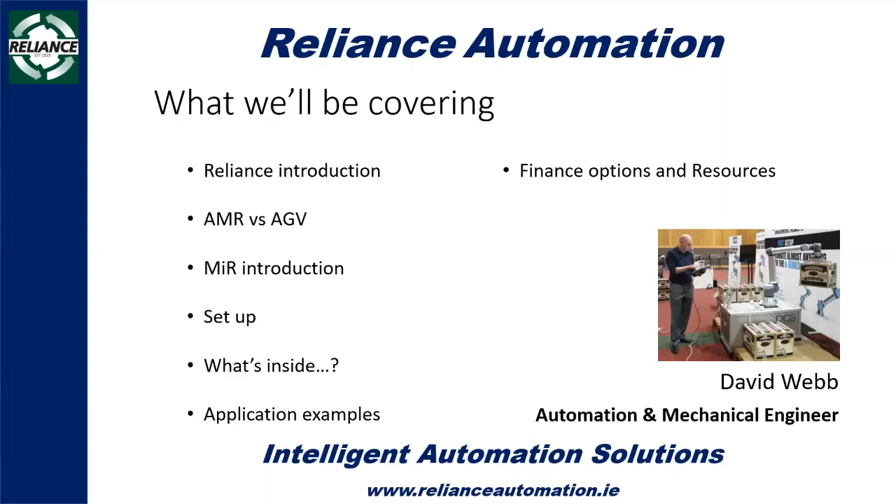So firstly, just a quick introduction into Reliance. Reliance Automation, we're a division of Reliance. Originally, they're Reliance Bearing and Gear Company. Reliance has been going for almost 100 years now at this stage, distributing within Ireland, started back in 1925, into the fourth generation of a family-owned business.

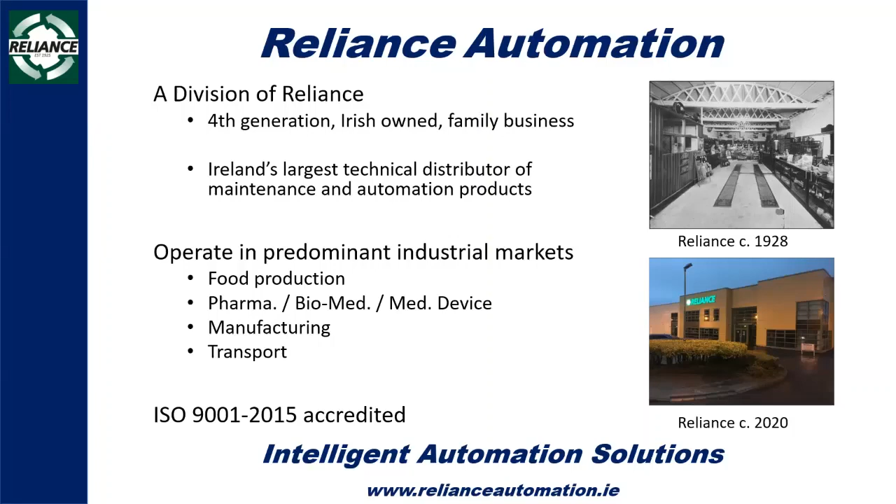We're a large technical distributor of maintenance and automation products, and we work in most industries around Ireland, with definite focuses in food production, life sciences, manufacturing and transport areas. We're also an ISO 9001 company, and in everything we do, we always strive to provide the best technical response while giving you good service and also value for money.

So Reliance, we've got 3 branches in Ireland. We've got the Dublin branch where I'm located, we've also got one down in Limerick as well, and our head office is down in Cork. About 50 personnel on board with us now at this time, covering the whole country for the different areas and the products we represent.

The main thing to note is that Reliance are a distributor in the true sense of the word, so we're not an integrator. A lot of the products that we sell would be out-of-the-box solutions that could be utilized for companies that don't have a huge amount of automation experience within them. But for more complicated processes that require a bit of design, etc., we work with an awful lot of the integrators in and around Ireland.

Each one of these integrators will have specialities in terms of the areas that they can address, whether that be the food sector or pharmaceutical, etc., and also in their locales and the geography that they're covering. So between the two of us, we're able to address any of the needs that you may have and come up with a solution for problems in your industry or the challenges you may have.

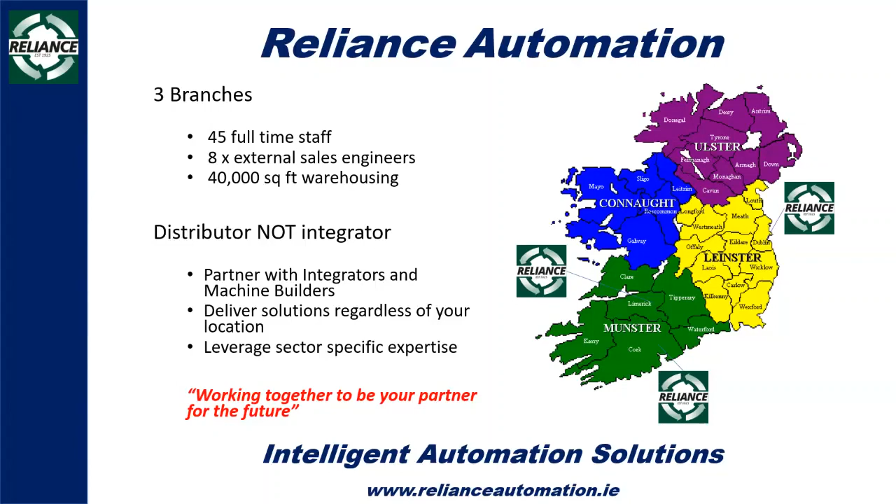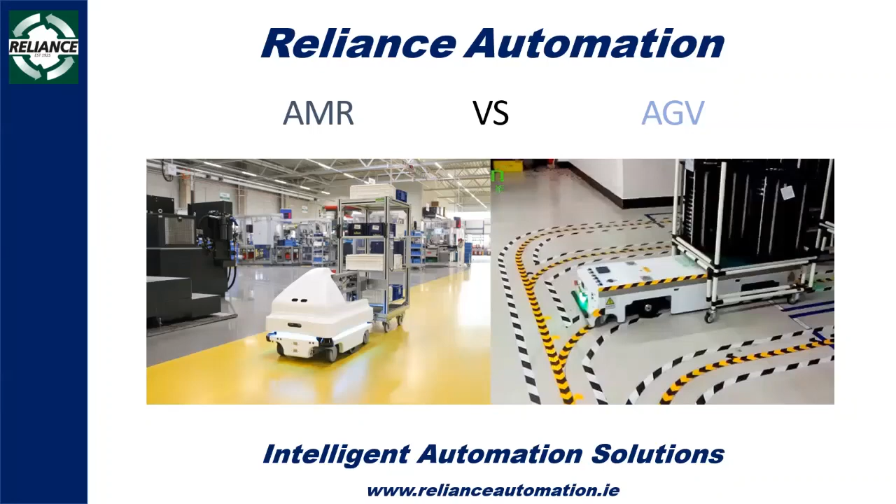Just before I jump into MiR's introduction, I wanted to go through the AMRs, so autonomous mobile robots, against AGVs, the automated guided vehicles. Because AGVs, as I said, have been out there now for quite some time, whereas the AMR technology is just the next iteration of this, and there's a few differences between them in terms of their capabilities.

AGVs typically require some sort of guidance system, like tracks along the floor, which is probably the most common one, to guide them from location to location. If they come in front of an obstruction, they can't physically move off that track, and it requires them to stop and somebody to come along and move that obstacle. It also makes it quite expensive to change, so they're not particularly flexible.

You've got to go in there, set down your tracks, and do a fair bit of forward planning in terms of the areas you're going to be going into. If you need to change that later, it's a case of putting down new tracks and changing it around. So they're somewhat restricted in that case.

Whereas the AMRs, these systems don't actually require tracks. All the guidance is done by the unit itself, creating a map and planning a route around that area. With the use of its sensors, it can detect if it comes up against an obstacle, whether that be something like a pallet in the way or a person, and it can then plan a different route around that.

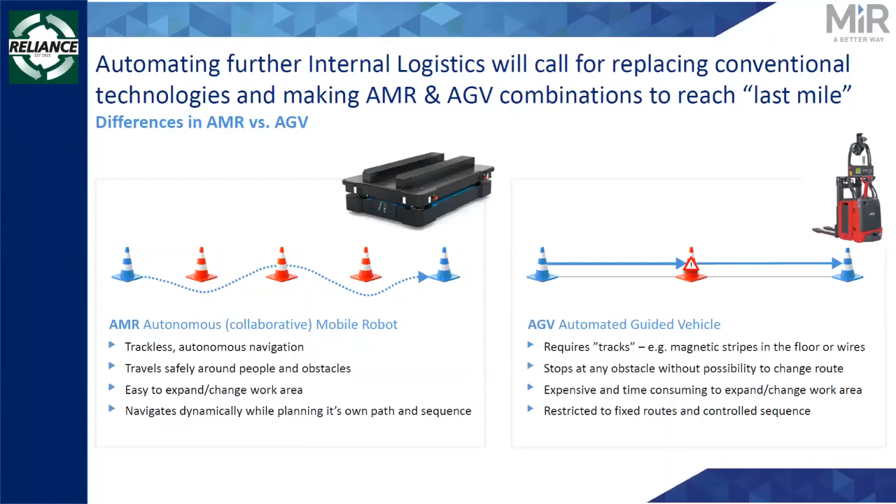You can set how many times it will try to do this before it provides an error, anywhere from around 10 up to 100. It can run through this, which means you don't necessarily have to be on hand to assist the robot between locations. If there is something unexpected, it has the intelligence to be able to move around it.

So now that we know what AMRs are, we'll jump into the MiRs specifically. MiR are mobile industrial robots, and they're a relatively young company, started in 2013 in Denmark. The story behind them is that the team that came up with Universal Robots a few years earlier sold Universal Robots to Teradyne, and some of those members then started to focus on the AMR side, creating the MiR unit. It was so successful that Teradyne actually purchased that company as well, so they're all part of the same group now, with a lot of synergies between them, both based in Denmark and in the applications.

You can see Universal Robots get inserted on top of a MiR unit for some activities. Even though they're a relatively young company, they've got over 200 employees around the world, and they've put a huge amount of that manpower into research and development behind the products. They're constantly increasing the product range - they initially started with the MiR 100, 200, and now have up to the 1000, plus the 250 that just came out very recently. We've also got an extensive support network - ourselves here in Ireland are the representatives for any local support.

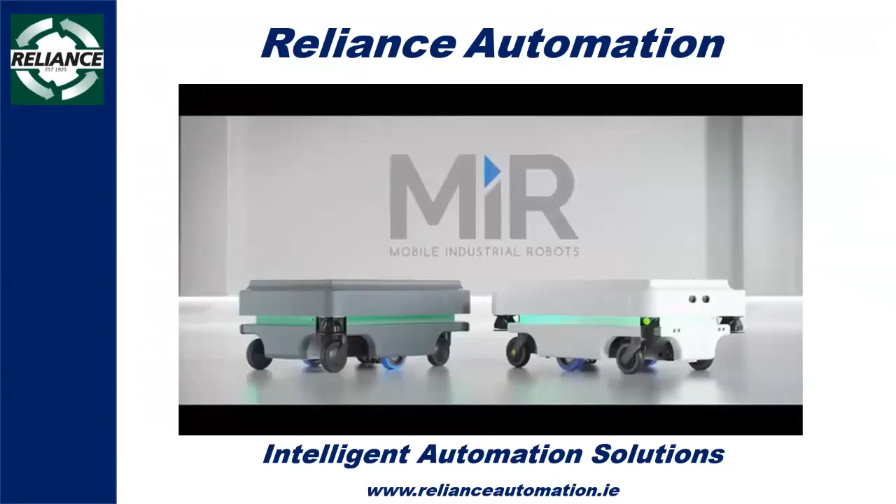At this point, the best thing to do is show a quick video which goes through what the MiR units can do and how to utilize them, just to give a quick introduction before we jump into any of the major details.

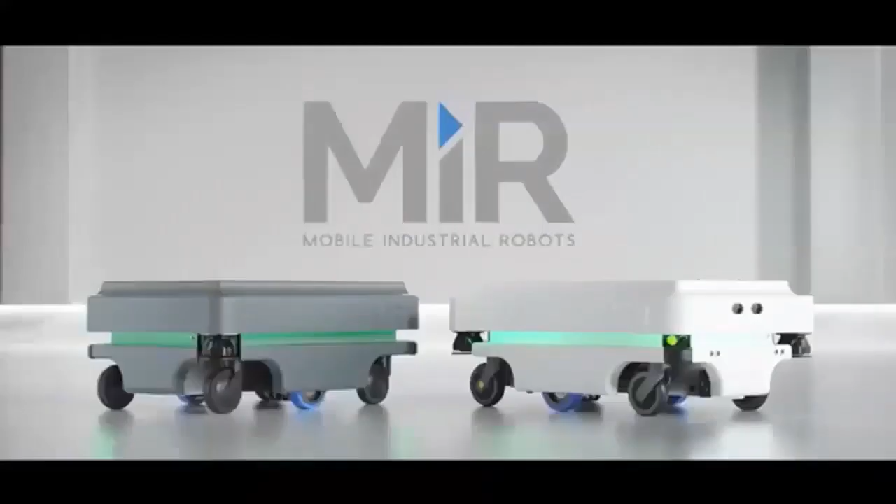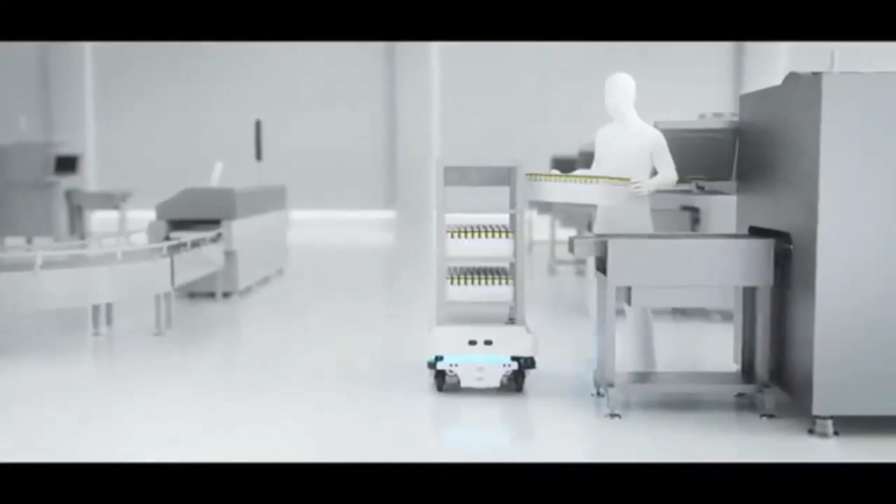Imagine a fleet of collaborative mobile robots that could optimize your workflow, increase productivity, and reduce costs. What if it was 100% automated and could collaborate with employees? And what if it was fast and easy to integrate into any type of factory layout? Sounds like something from the future, right? Actually, it isn't. Let me introduce you to Mobile Industrial Robots, MiR, an efficient and flexible mobile industrial robot solution.

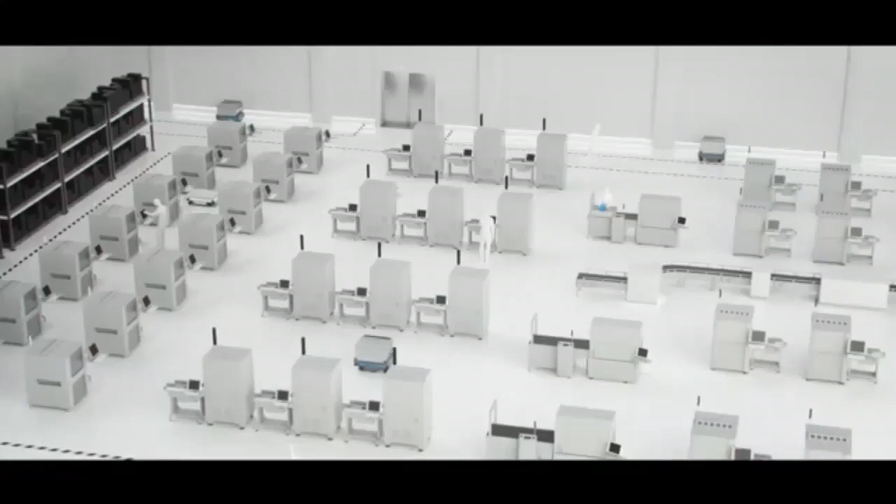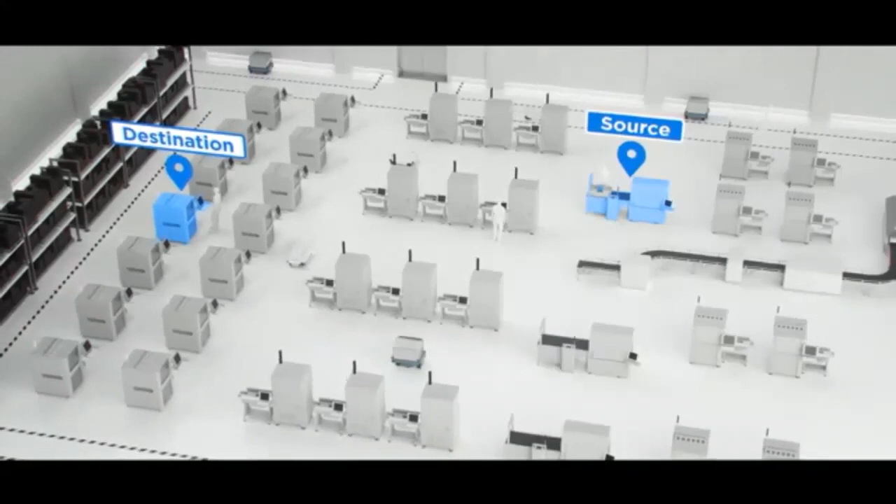So how exactly does the MiR fleet work? Let's have a look. Now the employee here would like to send the item he's just finished working on to the next production line. With the press of a button, a MiR robot is summoned. Once the button has been pressed, a signal is sent to the MiR fleet management software, which runs behind the scenes and manages all the MiR robots. The system automatically instructs the appropriate robot to navigate to the source point. The item is placed on the robot and is ready for transit to its destination. The robot drives 100% autonomously and can easily navigate around obstacles on its way.

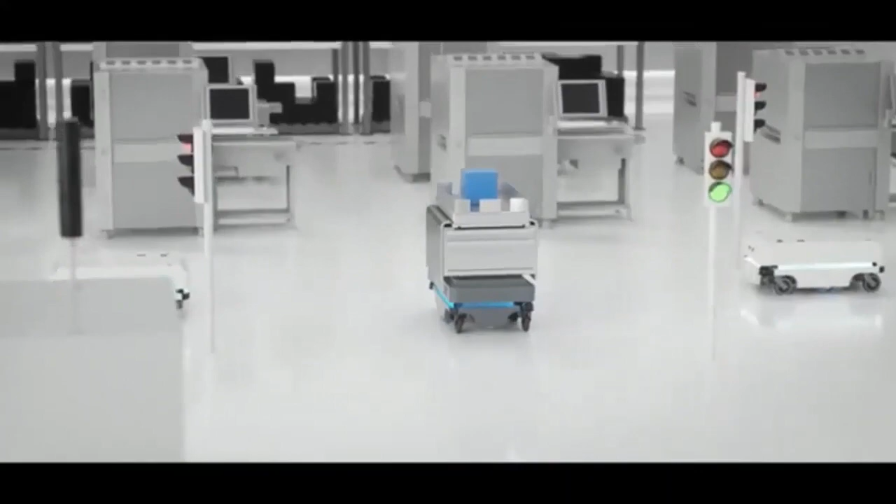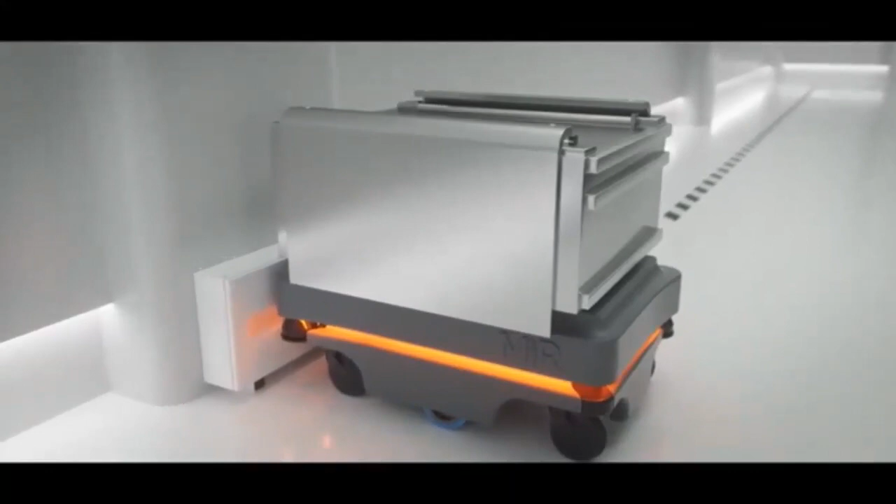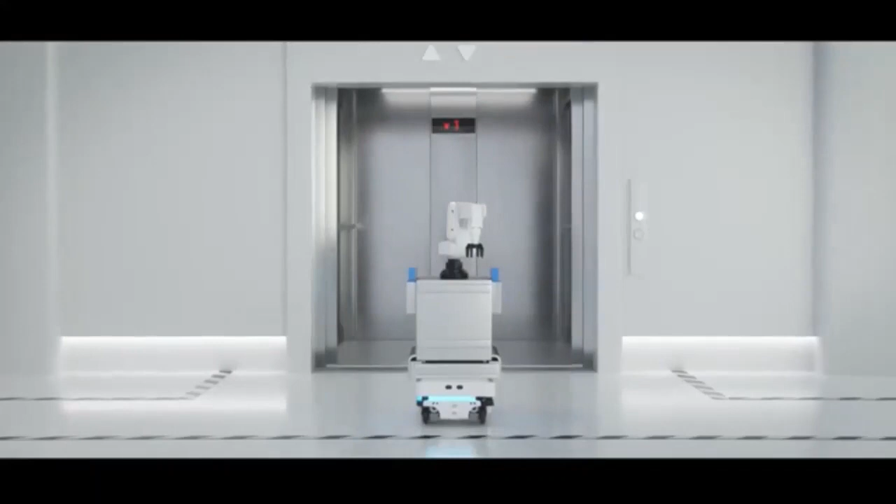The fleet management software automatically adjusts traffic in real time, ensuring that everything runs smoothly and efficiently. Now the robot has delivered the item to its destination. If there's nothing else in the queue, the robot can be set up to automatically park in a preset parking spot and recharge. The robots can also be summoned via tablet, automatic communication from production lines, or via your ERP system. You even have the possibility to create rush orders that are placed at the front of the order queue. Because the robots drive autonomously, they can perform complex maneuvers, such as navigating across multiple floors.

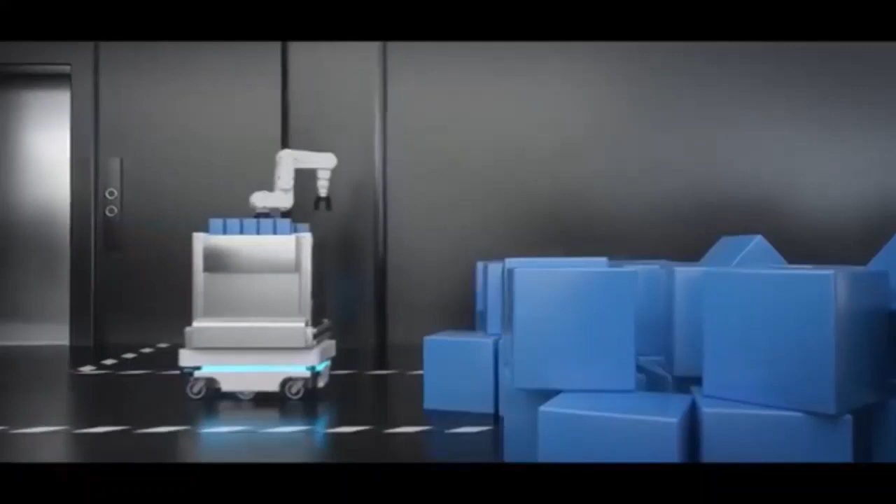If a robot encounters an obstacle that it can't navigate around, a notification is automatically sent to the user that an action is required.

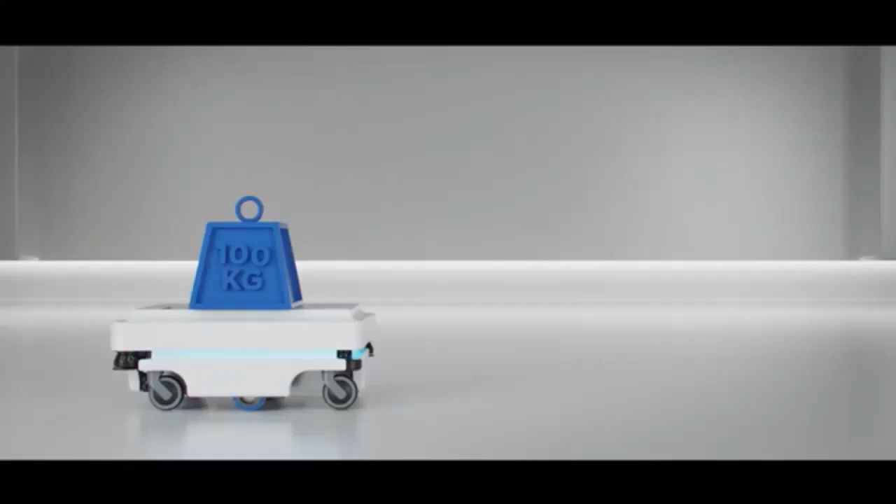When the item has reached its destination, the robot automatically sends a notification. The top modules are easy to change, so the robot can be redeployed for different tasks, whether transporting small, medium, or large items. We've got the solution to automate your internal transportation and logistics.

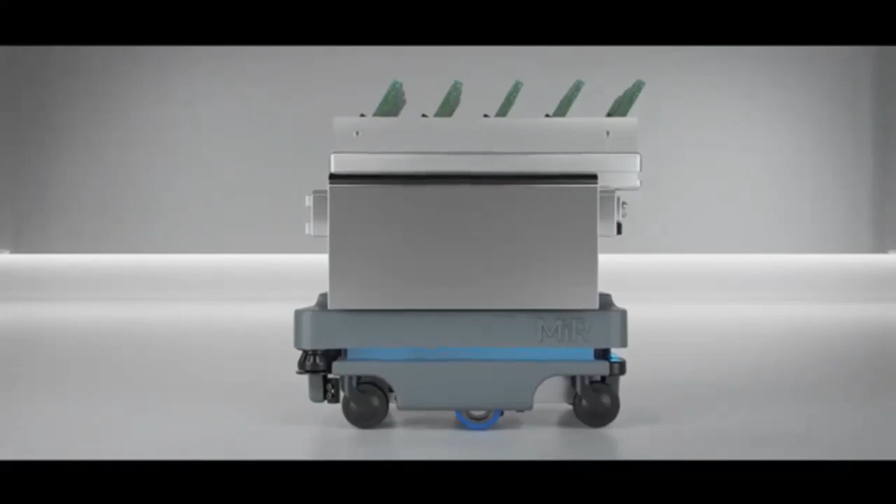Programming the MiR robots is simple. The user-friendly and intuitive interface allows for fast and hassle-free implementation. And you get customizable dashboards that make it easy for you to tailor the interface to your individual needs.

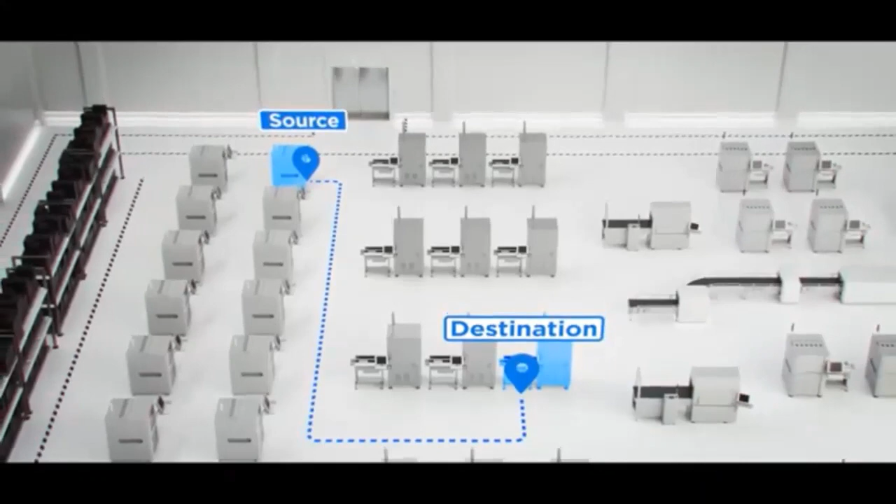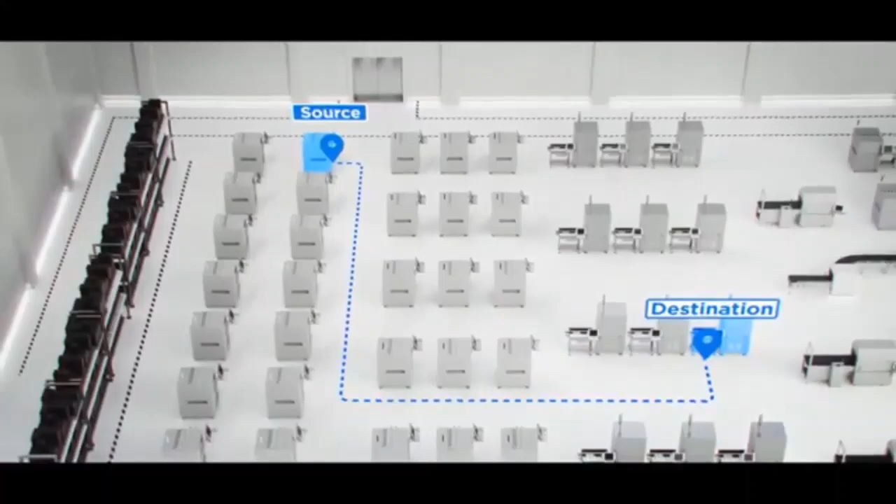At MiR, we know that factory layouts change rapidly. That's why we made it easy to reprogram routes. A few clicks and you're ready to go. It's that simple. MiR is one of the fastest growing companies in collaborative robotics.

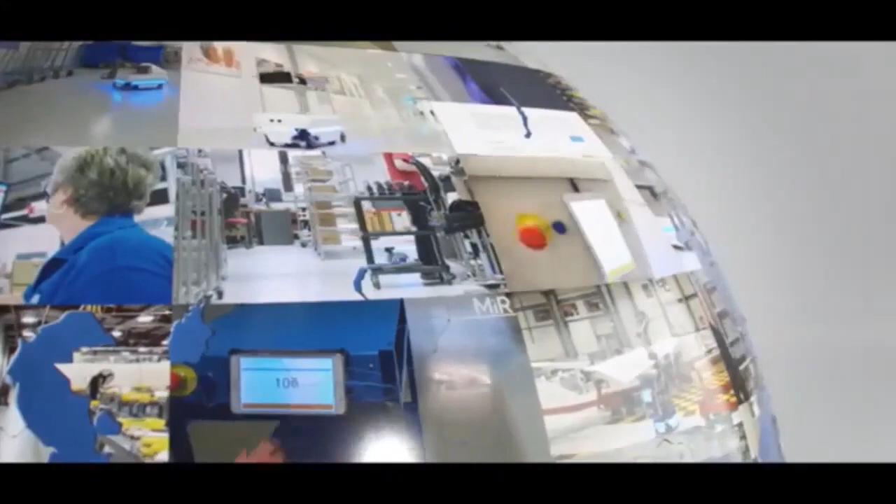Our solutions are used all around the world and are helping companies to increase productivity, profitability, and to streamline workflows. Contact us today to learn more about how we can help automate your factory layout. MiR Robots.

So I hope that was a good quick intro, just showing some of the features and how these things operate. Let's go in a bit more detail, like the way it navigates around the facility is by the sensors, and when we pop open the hood in a couple of slides time, you can actually see exactly which sensors are in it. And these are the ones that detect the surroundings.

You use these for mapping the facility initially, and then also for the actual navigation when it's doing its local routes around the facility. So it's very, very reactive in terms of how it can sense its surroundings and personnel coming towards it.

And it can run at various speeds and different safety settings as well, depending on what you're having on top of the unit or what activities it's conducting.

They're very, very simple to program. We'll run through the setup process just to show how easy it is to go, but essentially as soon as you get the unit in its box, you can have it up and running within an hour or so.

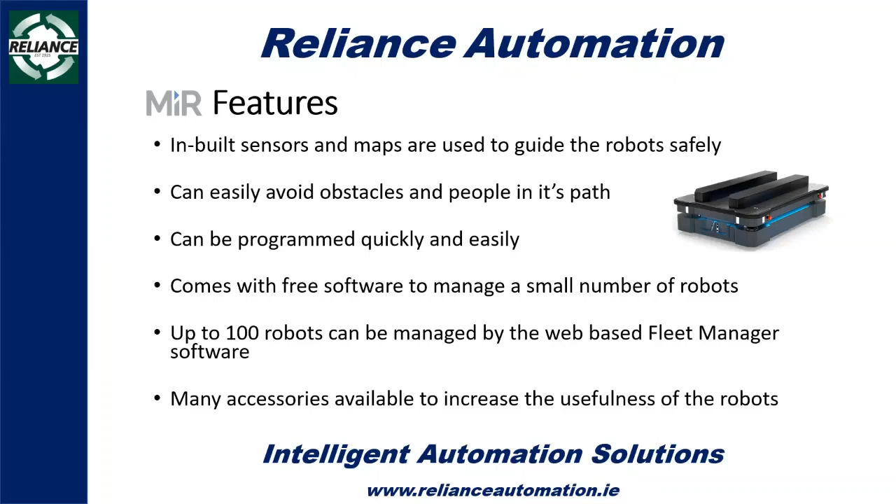So say, for example, the first one in the line is MiR 100. It can handle a payload of 100 kilos. And these go all the way up to MiR 1000, so taking on a ton of weight. They've recently released a MiR 250 in the last couple of months.

And in a lot of cases, the actual payload when they're towing rather than just lifting directly is actually a lot higher. I believe the MiR 100 can take up to around 200 kilos when it's pulling along. Similarly, the 200 can take up to about 500 kilos or so. So there's a bit of flexibility there in terms of solutions.

On top of the MiR units themselves, MiR manufacture a few accessories that go along with these, such as the MiR lifts. So if you're having a palletizing application, you can actually place the pallet on top of a little stage, and then the MiR unit can come underneath that stage to collect the pallet.

They've also got their own charging stations as well. These can be just bolted to the wall, and then the unit can find its way there. And we mentioned the MiR fleet then for when you have more than one unit and want to go into programming priority tasks and things like that for your fleet.

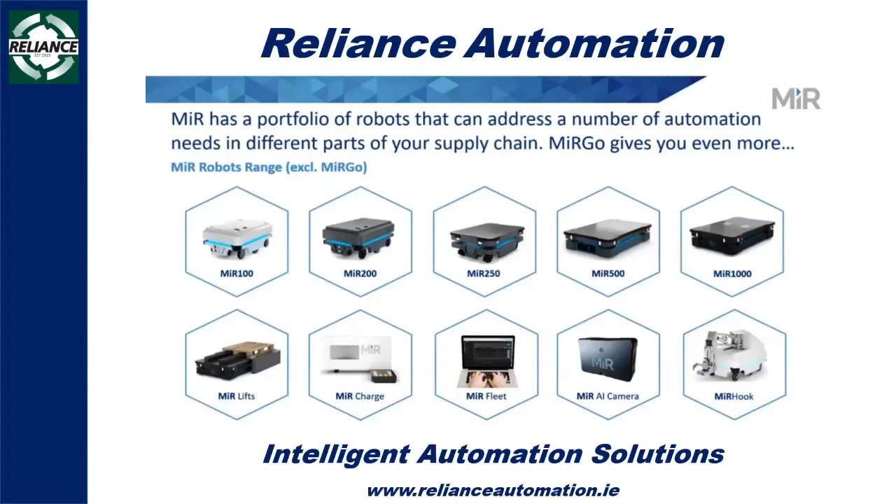So as well as what MiR manufacture themselves, they also have an ecosystem called MiR Go. This would be very similar to the UR Plus concept if you're familiar with universal robot units. So essentially, third parties design up parts - these may be conveying systems, shelving units, or ways to integrate robots onto the top of the MiR units.

And then these are certified by MiR themselves. They have a look at the design and the software and all the other applications that deal into that, and then certify them within their system. On their website, you can see all the different applications these are associated with. So it's not just the MiR units itself, you've got access to a huge range of functionality within that.

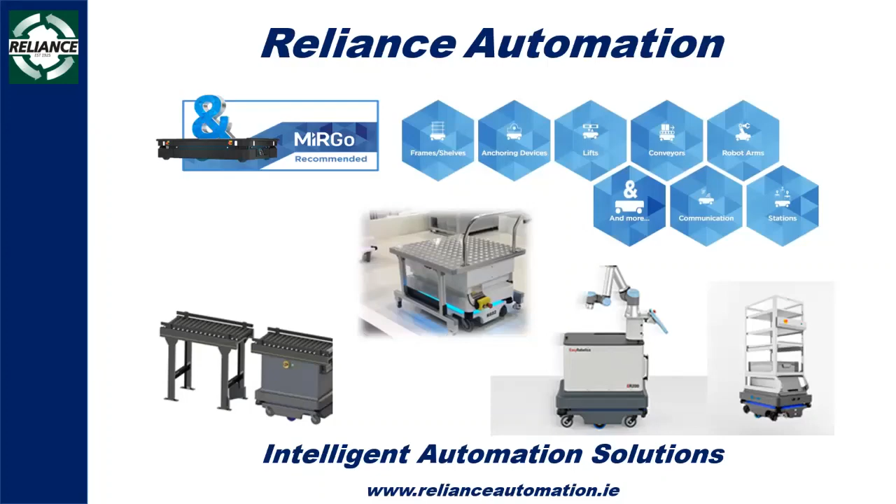So since we've talked about the features and the units themselves, we'll have a quick look at the setup. We said it's very easy. We recently got our unit into Limerick a few months back, when we had our own test day with it, and it is just as they say.

Essentially, the MiR unit comes in a wooden crate, and what you've just got to do is drop the four sides off the crate. You've then got to power on the unit, so just take off the hood and flick a few switches, put on the emergency stop onto the unit, and then once it's powered up, you connect your mobile phone, tablet or laptop. Mobile phone tends to be the easiest piece, and you essentially get a joystick and just drive it off, and then you're good to start your programming journey.

After that, you'll start to map your facility, and depending on the size of the facility, this can take maybe an hour or so, depending on how many floors you're looking at. But our Limerick warehouse was mapped within the hour. And then after that, you can just start setting tasks directly into the software. So very, very quick and easy to set up.

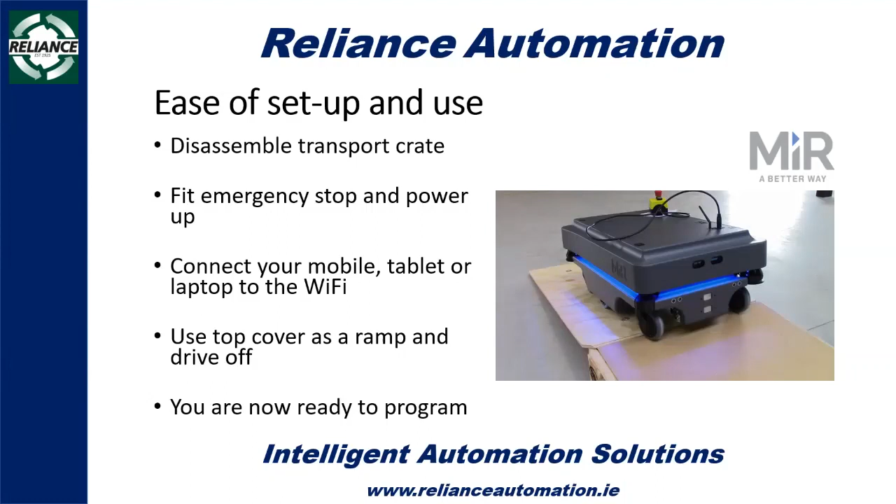In case you don't believe me, I've just got a video here that shows you exactly those kind of steps that it goes through.

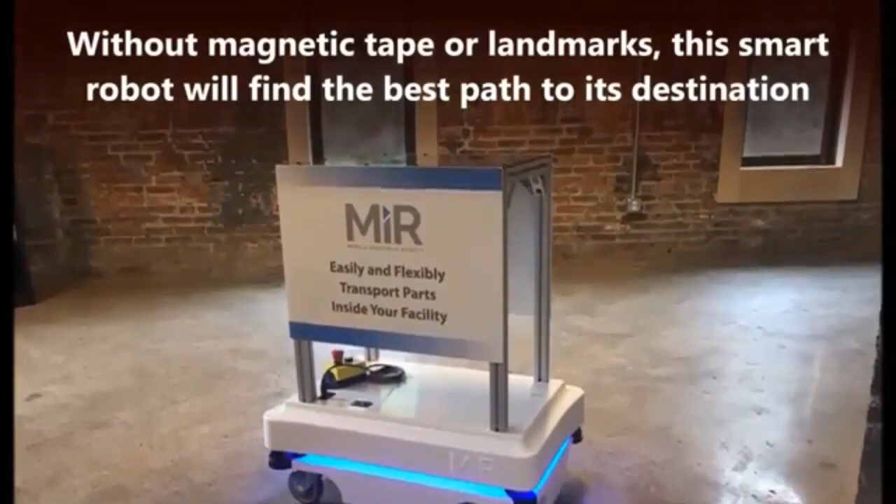So yeah, very, very simple.

So after we've had a look at what these units could do and how we set them up, we'll go into a little bit more of the technical side of things and how they actually achieve this.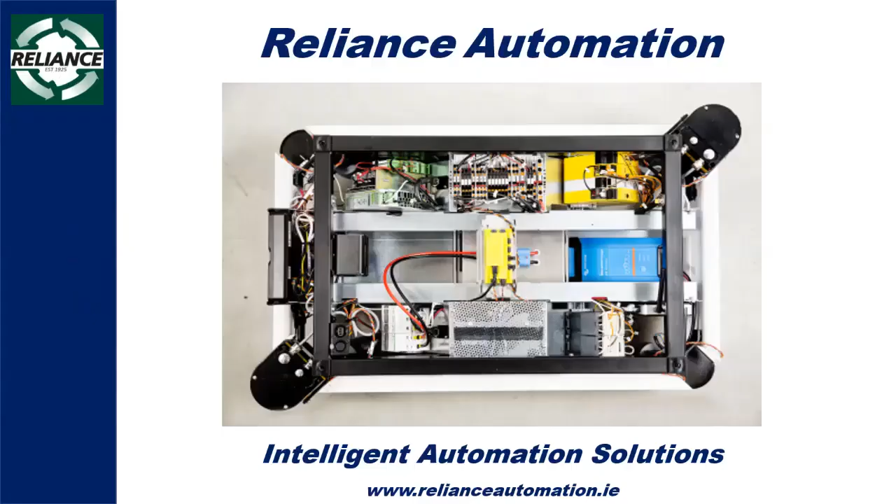So here we have one of the MiR units, the MiR 100, and essentially it's just got the top module pulled off it, and then you can see all the internal pieces within there. The first piece, on the left-hand side, which is the front of the robot, is the 3D scanner. This scans the environment, specifically picking out pieces at a height so that you can actually see what's around it.

Then in both of the corners, the bottom left and the top right, you've got two safety scanners. What these do is give 270 degrees of view around the robot, so that once these are consolidated within the system software, you've got full 360-degree information being fed back into it.

The blue device on the right hand side is then the battery pack. So in this unit there's one battery, but in some of the models you can also have two batteries to increase the life of the unit as well.

So you can see the power supply, the drive system, and the contactors are all contained within the meshed unit there, so as not to cause any interference within the unit.

And then in the bottom right, you've got the LAN connections for setting up your Wi-Fi and for connecting into it. The robot utilizes the scanners as well as encoders within the motors to be able to locate itself and tell it where it is at any given time.

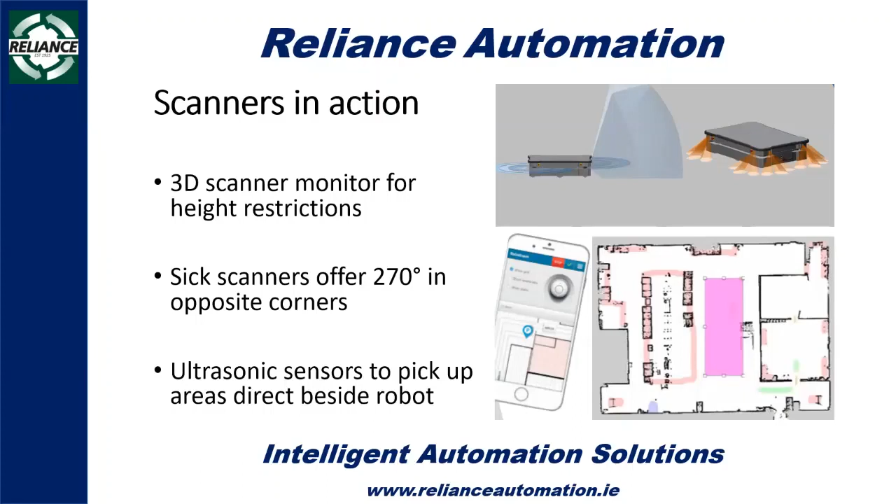As well as the standard units, there are also units with ESD and clean room classification. The smaller MiR units, the 100, 200 and 250, are clean room certified.

They've got different aspects on them that help with containing the dust that might come off the wheels or anything. And they're also electrostatic protection certified as well. You can get that option, so they can be utilized in a variety of industries.

Pharmaceuticals or electronics manufacturing would probably be the two most common industries where these are seen or required. This allows you to essentially go from a clean room environment out into the warehousing area, saving personnel from degowning and putting their stuff on and off the whole time. These units can transfer in between and save an awful lot of time in the logistics from that perspective.

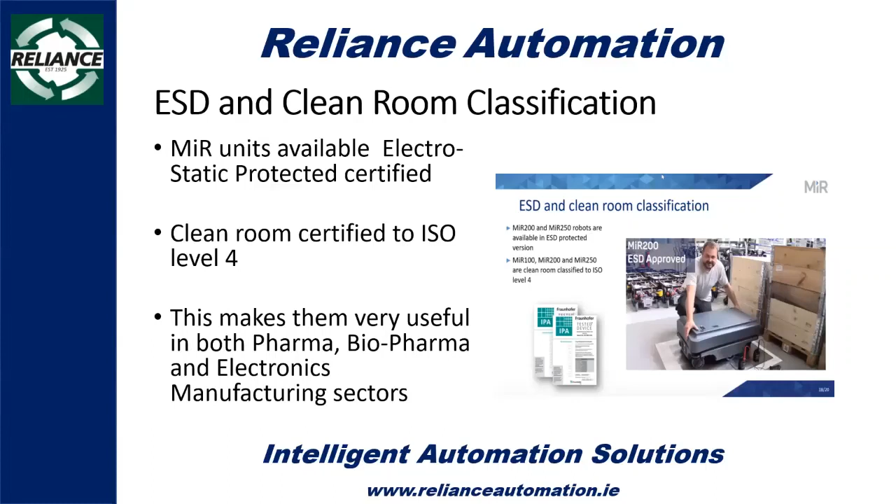So now that we've seen the range and what they can do, we've just got a few application videos here now to give you a snapshot of where these have been utilized in real industry.

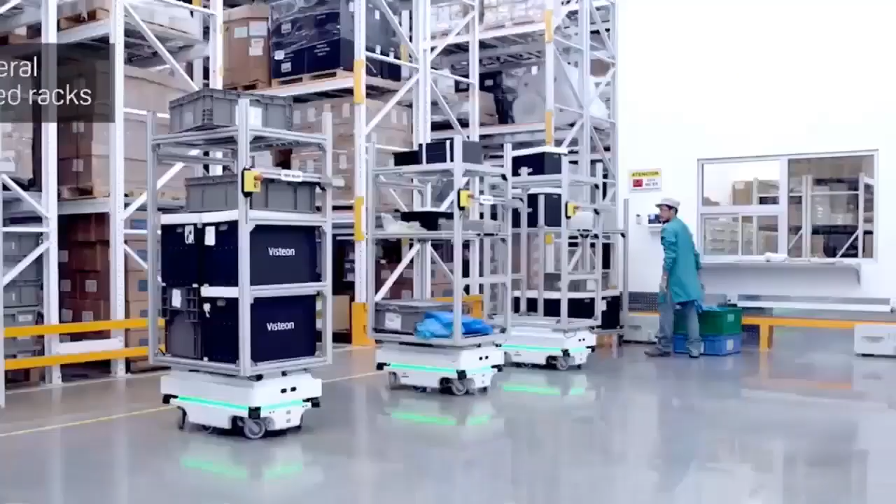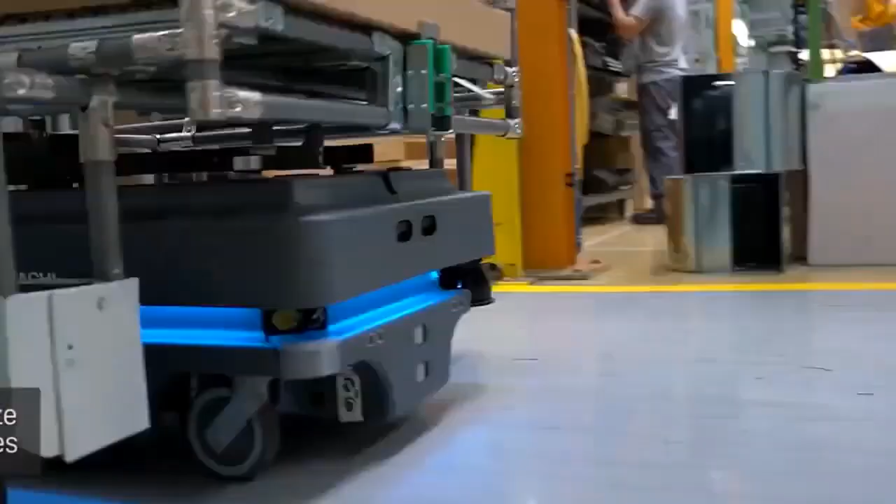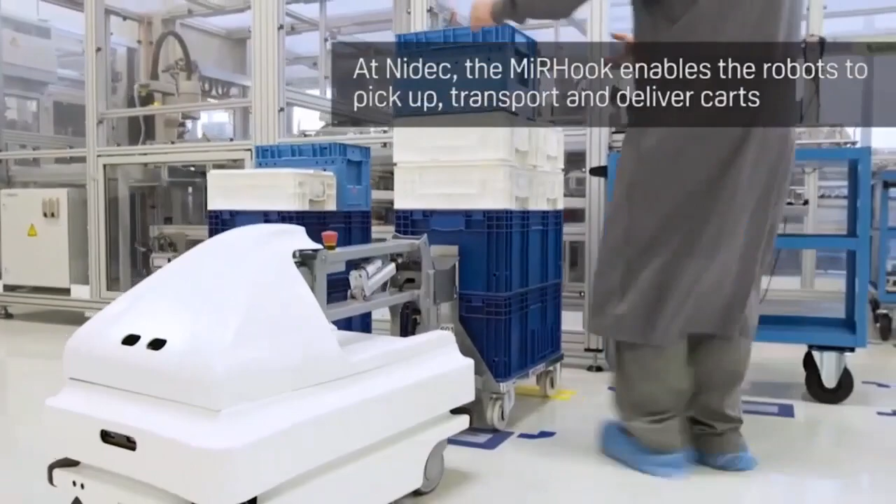We are constantly looking for ways to optimize our productivity and efficiency. The use of mobile robots enables us to implement these optimizations in order to improve our efficiency, productivity, and safety. They autonomously transport material and empty containers between warehouse and assembly. For this task, they're equipped with the MiRHook.

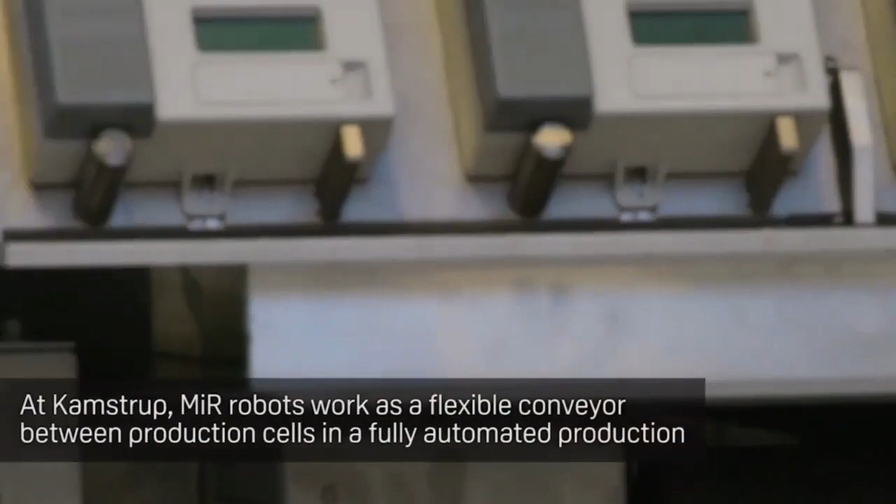We use MiR as a conveyor belt. We use it to transport our semi-finished products and our finished goods from production cell to production cell. Three MiR transport robots are now the adaptable link between different production lines. This is a new way to produce that enables Kamstrup to upscale without any production downtime.

We are currently using 7 of them with 3 different top modules. They are capable of detecting obstacles, and we not only track their location, but also their task at all times.

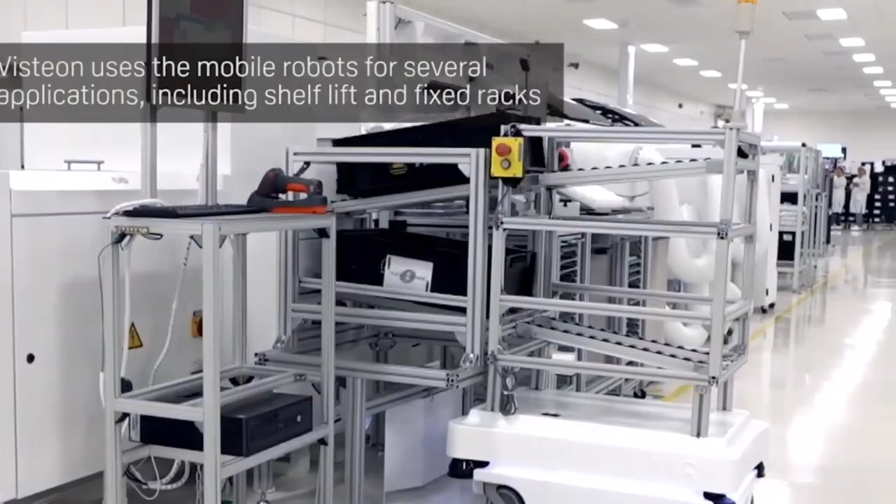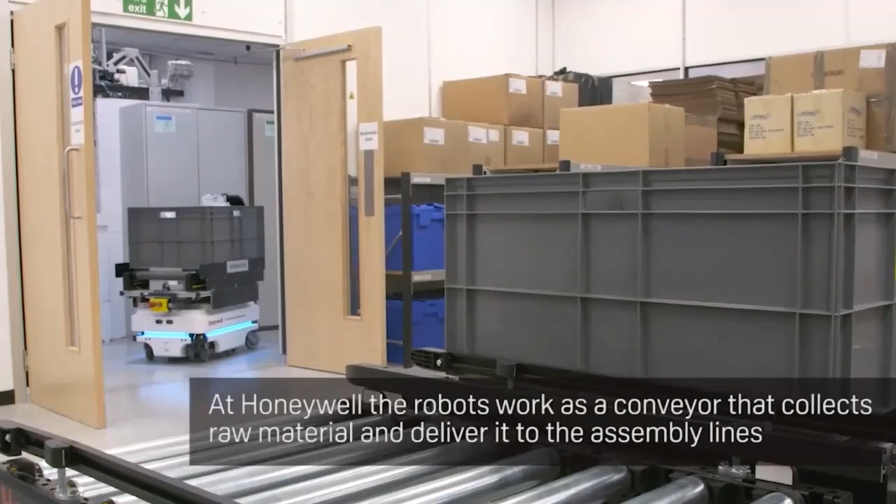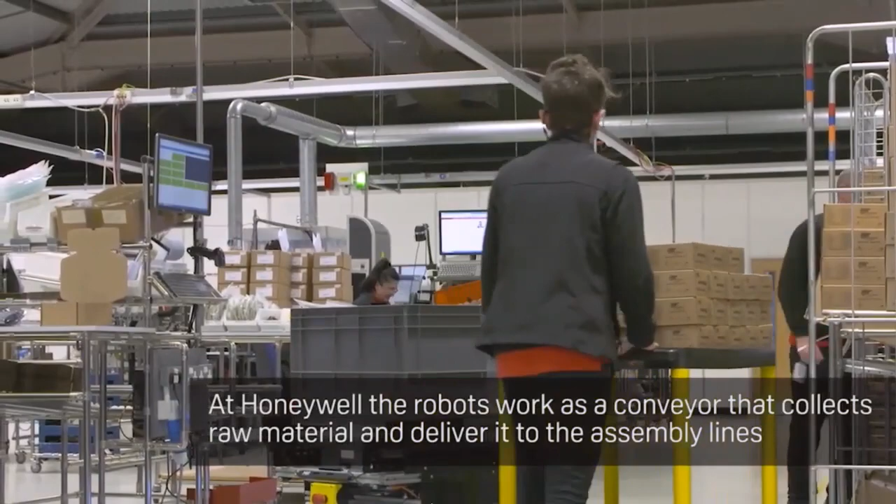We started on the MiRs just doing manual assembly line stuff in a very basic format. We upgraded the MiRs to have a conveyor system on them. They can now go down to the warehouse and collect raw material, and then deliver that to the lines. By putting the conveyor on the MiR, we gain the flexibility of being able to move anything where we want around the factory. Fortunately with MiR, they have an open interface so we can connect third-party equipment to the robots.

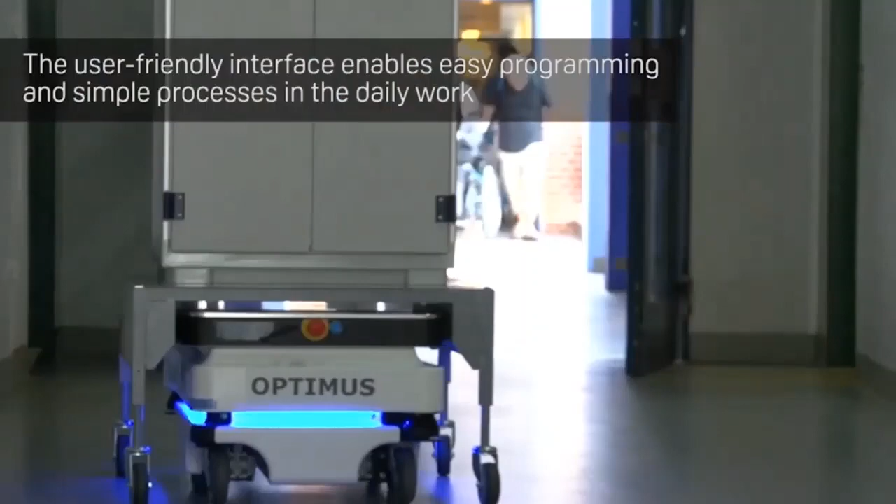We chose MiR as our mobile robot because it was a flexible solution in which we could see a lot of potential.

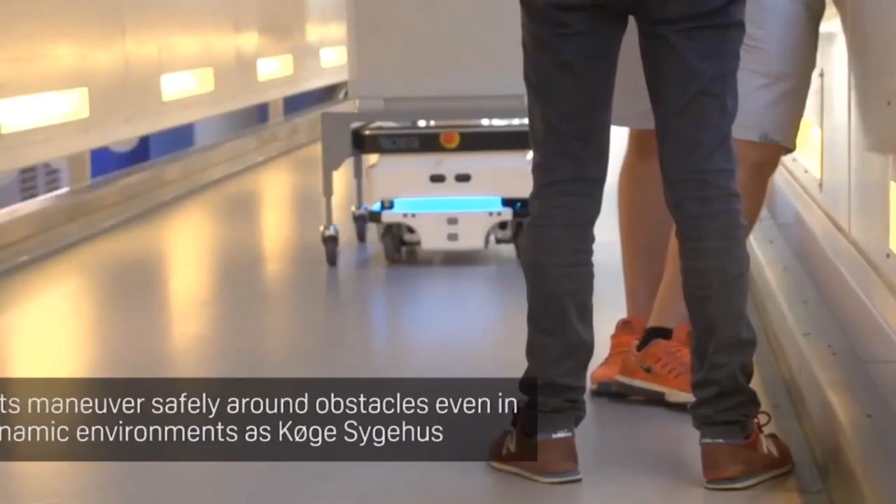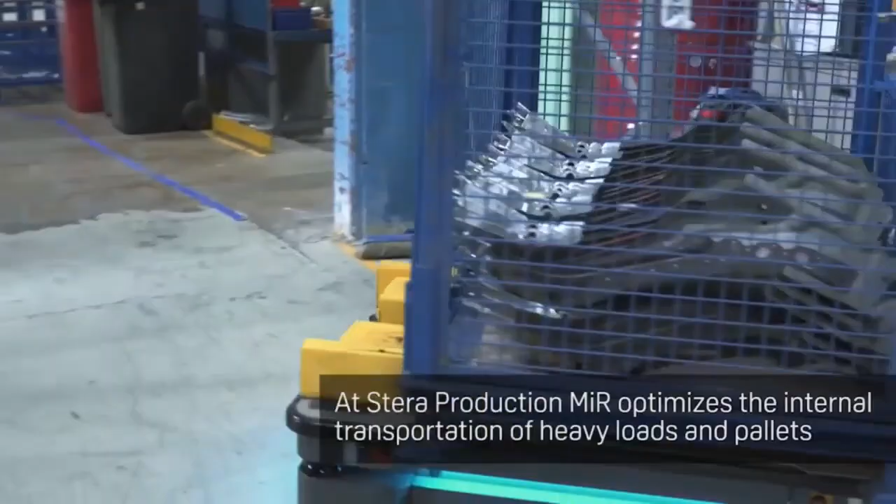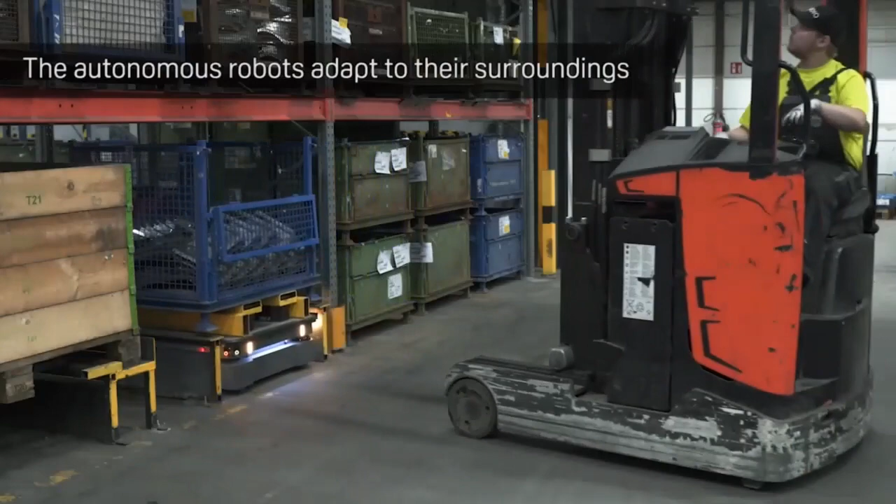We were looking for a solution that could have the payload up to 500 kilograms, and MiR was up there for the task. We were also looking for a solution that would be easy to set up and fast to start operating, and of course a safe system that could work with the truck drivers. This has increased our productivity.

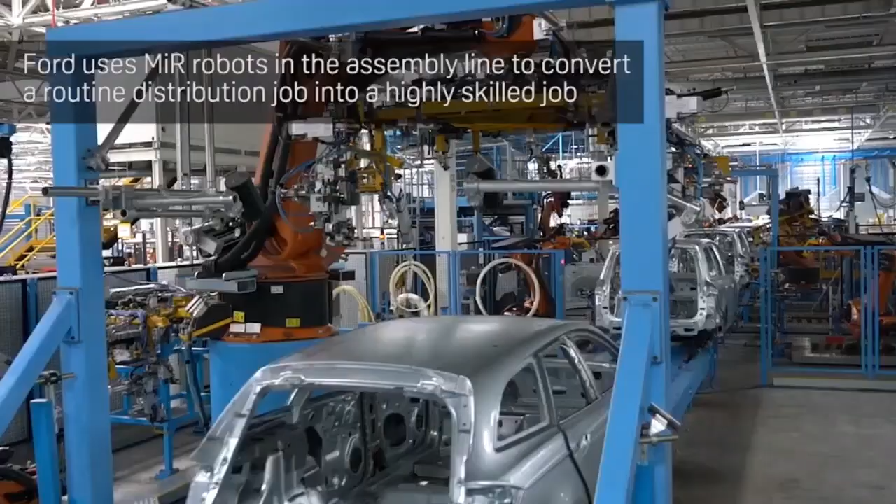We have already proven that these robots are able to learn their route by themselves, as well as that they are perfectly able to interact with our employees and forklift trucks in complete safety.

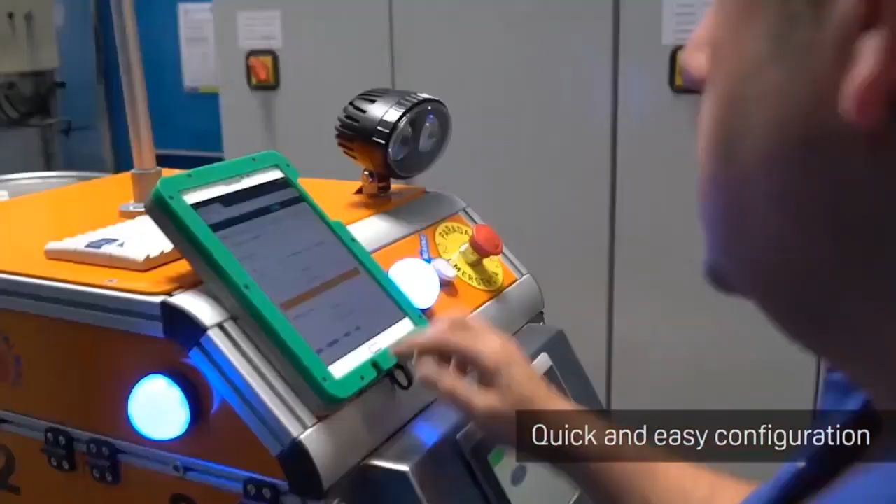Making the robot easy to use was extremely important to us. I would split the ease of use into two parts: first, how easy it is to use the robot itself, and second, how easy it is to use our application.

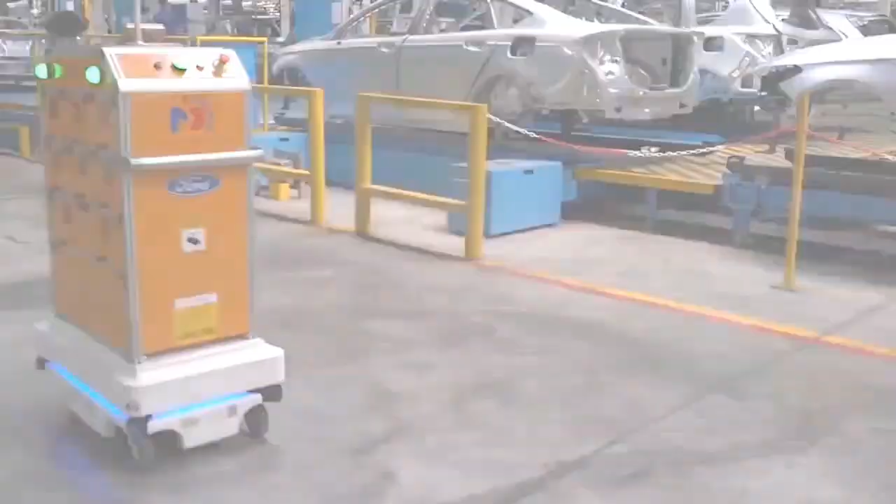So there we have a quick snapshot, and you can see they're utilized in a variety of different industries for a variety of different tasks. So really it's just a case of having a discussion to look at your applications and how they can potentially help the logistics procedures within your facilities.

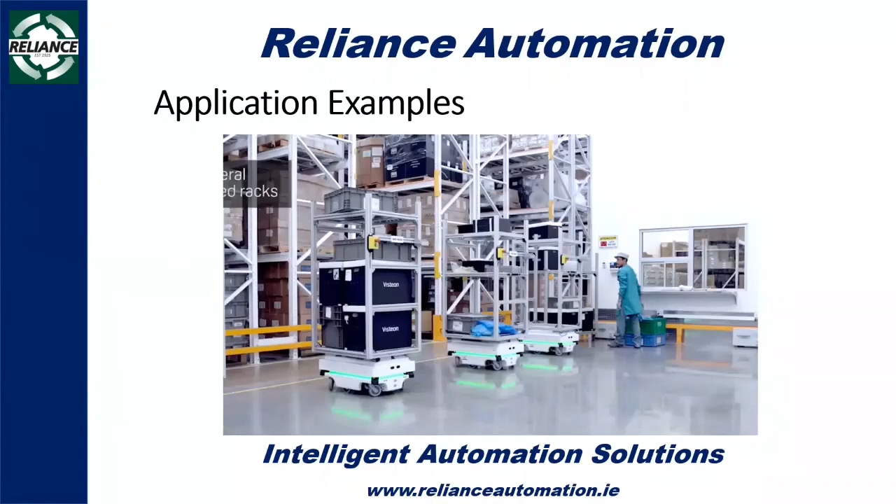So getting started with these robotics, or robotics in general, a big piece we find is a barrier is that personnel have applications and want to integrate these technologies, but unfortunately don't have the upfront capital to achieve this.

So MiR have finance partners, and just to let you know that the options are available there and very flexible. Depending on your situation, these can be set up for different terms, maybe 2 years, 5 years. They've got quite low rates at the minute, and they also offer a huge amount of flexibility in terms of the actual payment schedules.

So if it's a facility that potentially has a seasonal cash flow due to production, this can be incorporated into the financing as well, so you can pay more during busy periods and less when you're a little quiet. It also gives you the opportunity of deciding what you want to do at the end of the lease period, whereas if you want to purchase the robot outright, or send the robot back and get the latest technology, this is available as well. So that's out there if the issue within your facility is that initial capital.

As well as the finance side of things, there's an awful lot of resources available to help you out on this starting journey. So whether you're not using automated logistics yet, or you just want to optimize processes within your facility, they have a range of resources available to help along with this.